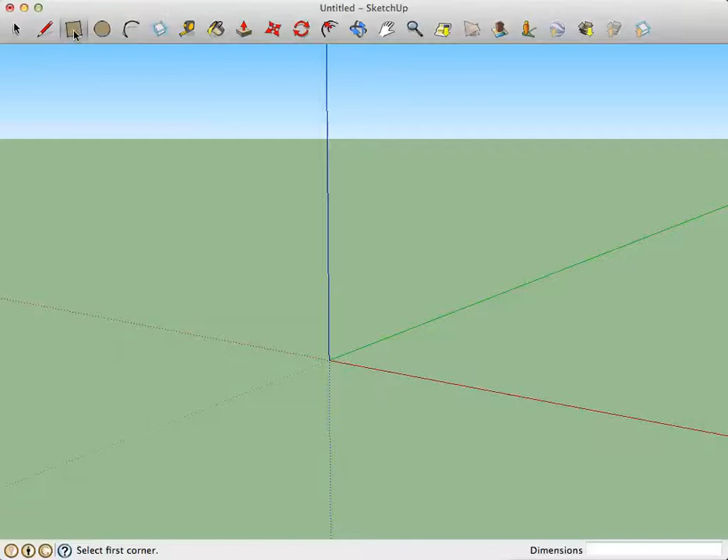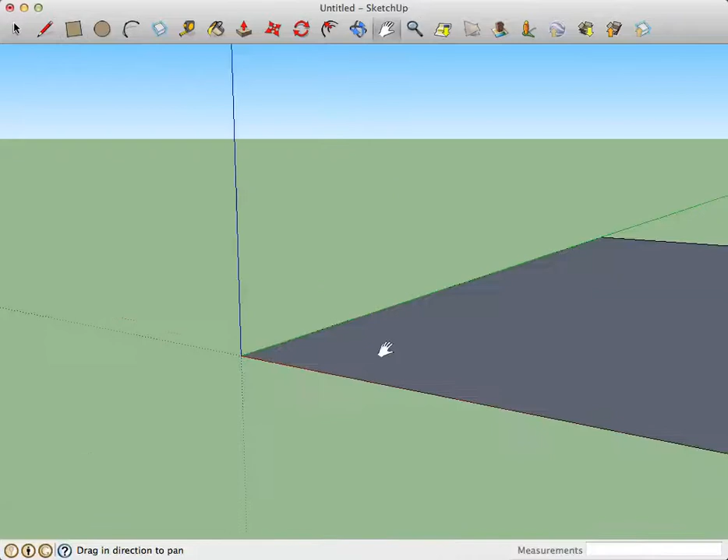I'm going to click on the rectangle tool, start from the vertex, the origin, and then I'm going to click out and drag out. Now, I'm going to change this to 6 inches by 6 inches, and that'll be my base. Hit enter. Okay, and I'm going to just pan this out so you can see. Zoomed in a little too far. Pan that out so you can see how this works.

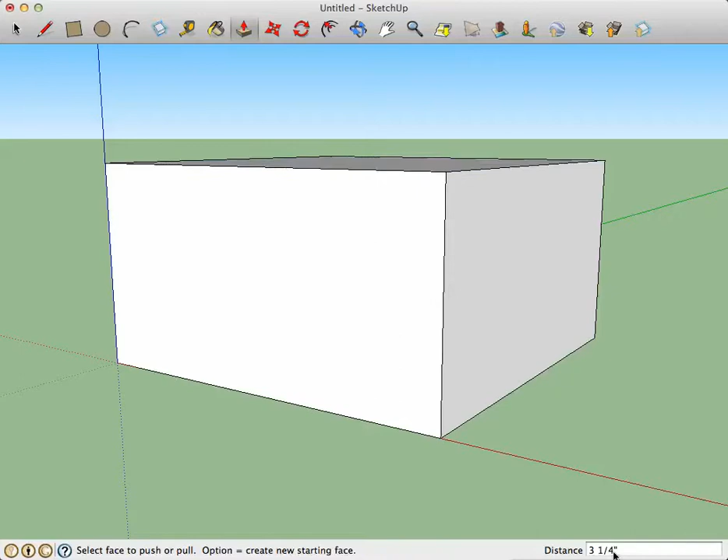Okay, now I'm going to take this push pull tool, and I'm going to click on this rectangle that I built. I'm just going to click and drag it up. Okay, now I can resize this to my perfect size of 6, because I want it 6 inches tall. Okay, there's my cube that I'm going to start out with.

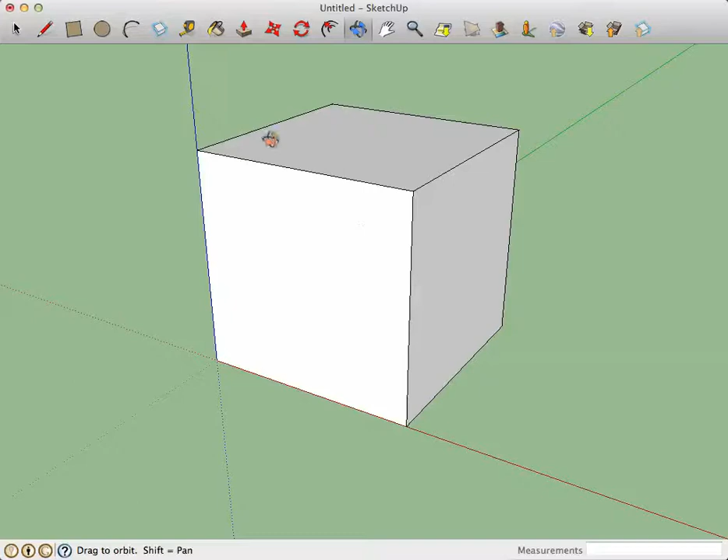Now to build this, basically, we're going to build it by deduction. So we're gonna take pieces out. Okay, so the first thing I need to do, I need to take this front wall and move it back 4 inches. So what I'm going to do is take this push pull tool, and I'm going to move this front wall, I'm sorry, everything except for the 1-inch base.

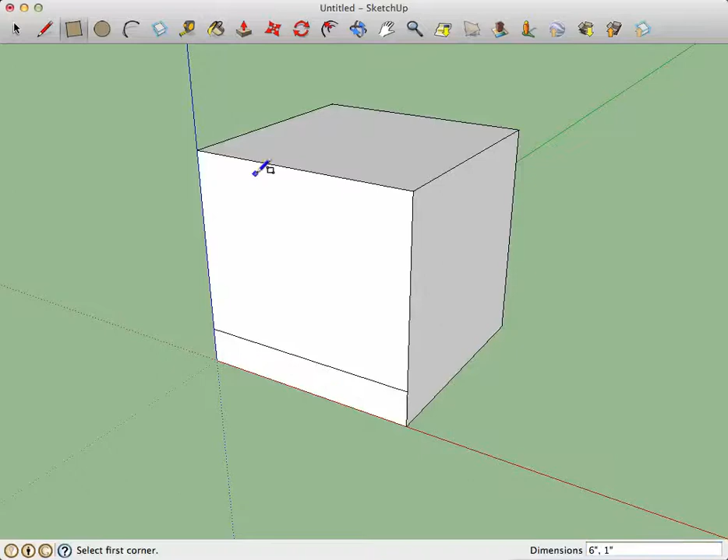So first of all, I got to draw me a rectangle again at the bottom, and I want to make it 6 by 1. Okay. Alright, so now I'm going to take my push pull tool, and I'm going to click and drag it back to 4 inches. So we should be at -4 at the bottom. You can see the distance moving. So I'm here at -4 inches.

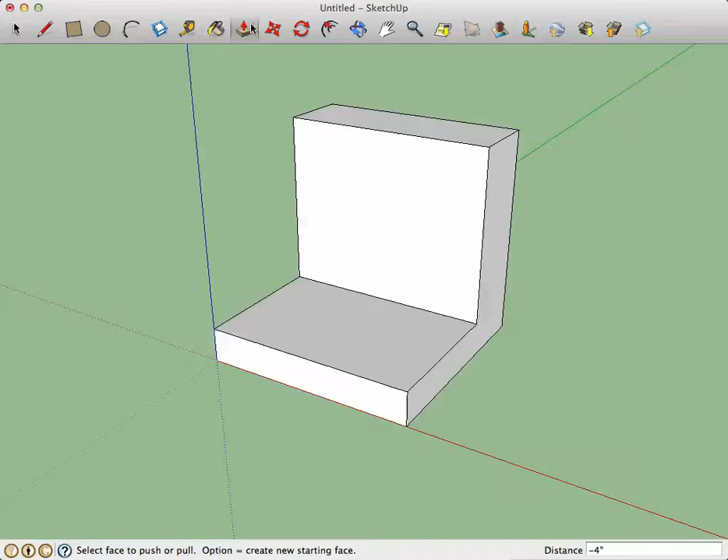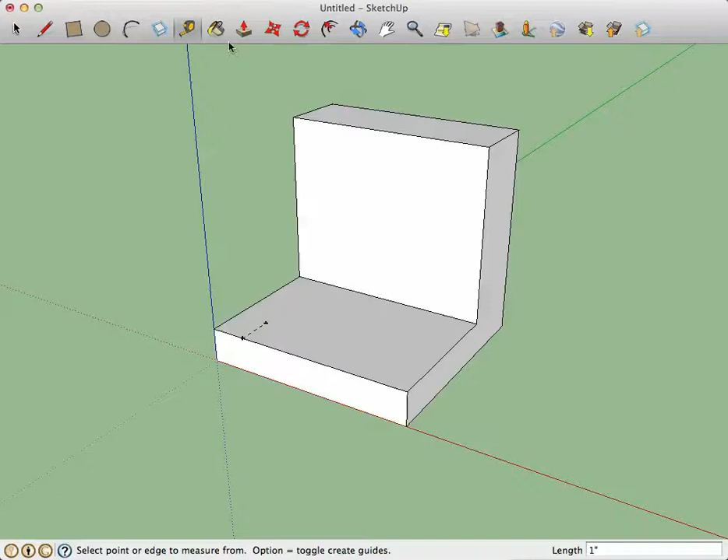Okay, that's my base. Now within that base, there is a square knockout. So we're going to go 1 inch this way, and then we're going to go 1 inch in depth, and there's a hole that is 2 inches by 2 inches square right there. So I'm going to draw me another square right here that is 2 by 2. Okay, hit enter. So there I have my hole.

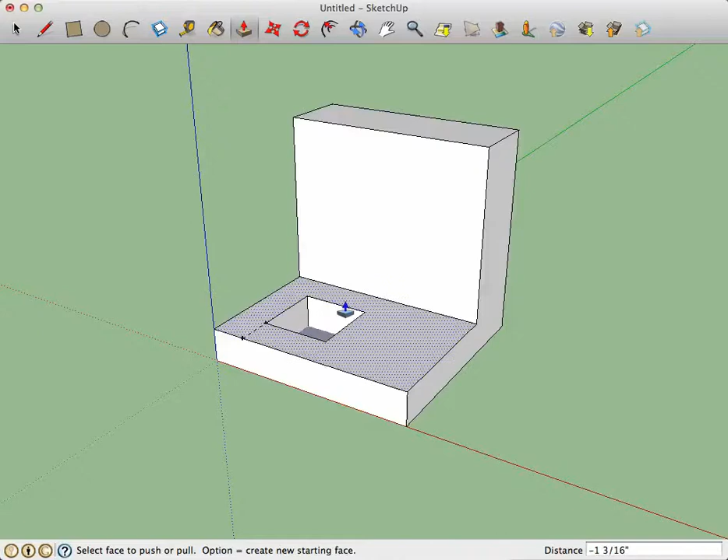Right now it's just a rectangle, but now I'm going to use my push pull tool, and I'm going to get rid of that. Okay, and it'll go all the way down, and you can rotate this thing to see the hole. Now I'm gonna click in that hole and completely delete it, so you should see green underneath. Okay, so just click to delete that.

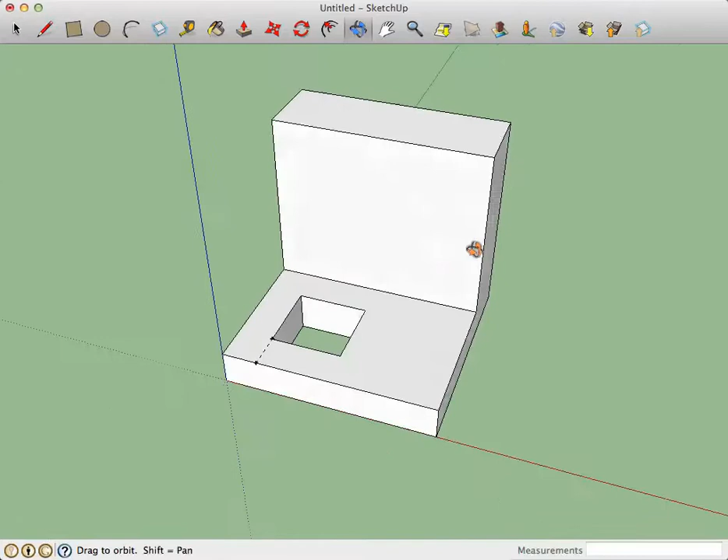Okay, it's completely gone. Now we need to cut off this front edge, and it looks like it starts at 4 inches from here. So I'm going to drag this ruler 4 inches down, and then it also is 4 inches from here, as each little unit is 1 inch by 1 inch.

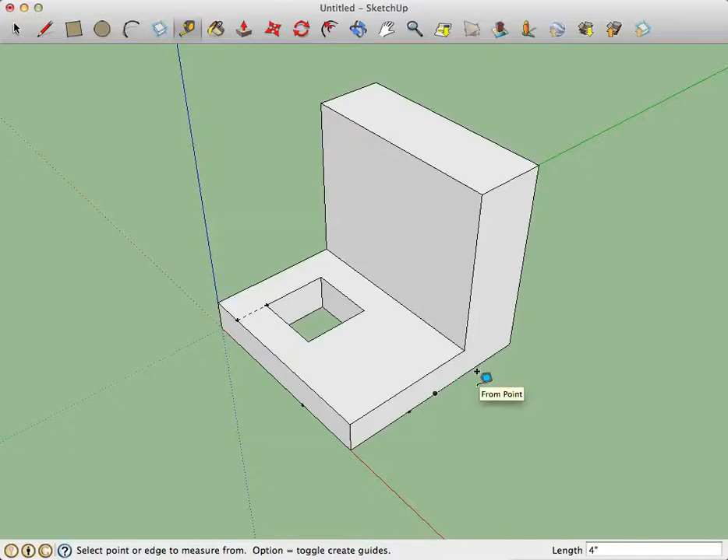And so now I'm going to take this pencil tool, and I'm going to draw a straight line across to there. I need to do the same thing here, and it locks it in place for you, so it's kind of nice. Alright, so now we're going to get rid of that. I'm going to use my push pull. I'm going to push it down, and then I got rid of it. Okay.

Alright, so now all we have left to do for model number 3 is we need to take out what looks like an arc right here. So the arc starts 2 inches off this front edge, 2 inches in. So we're going to move it to 2 inches here. And you could just type that in. And 2 inches from there.

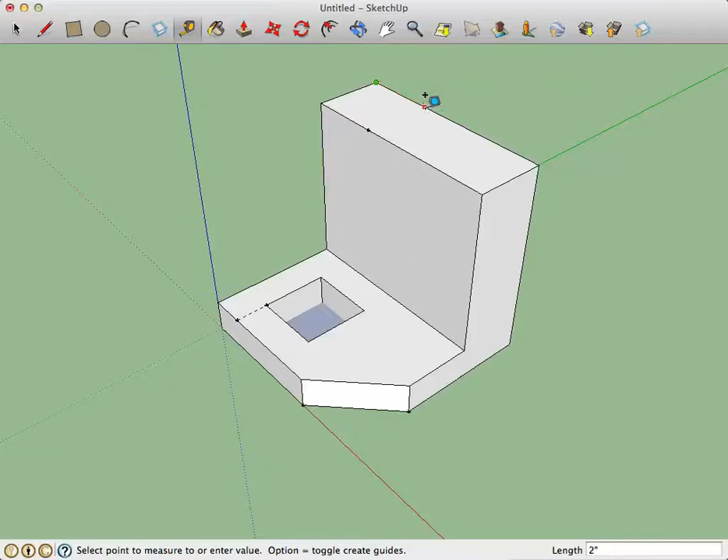Alright, and it's also 2 inches from the bottom. Okay, so let's go 2 inches up. And there we are. Now we're going to also put that line, so that'll tell us where we're going to connect this.

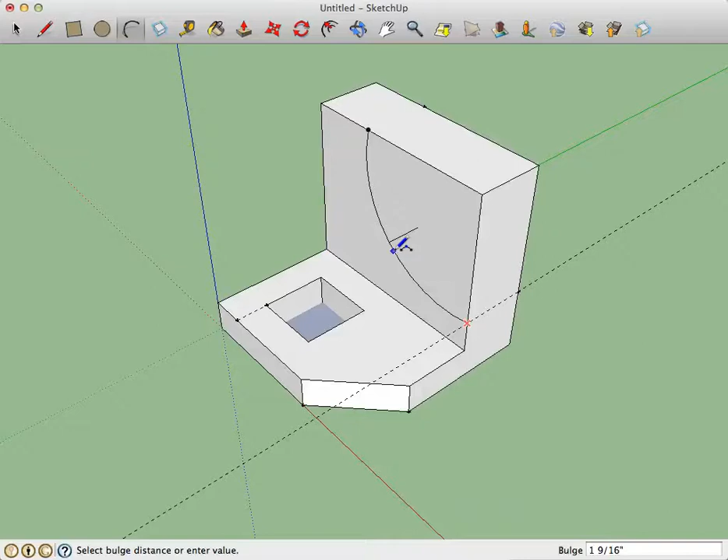We're going to take the arc and we're going to make it go across here, and then let's see, how far down does the arc go? It looks like it's going to go down and be at the 3 inches over. So what I want to do, I'm going to click off this. I'm going to undo that arc because I need to make one more measurement.

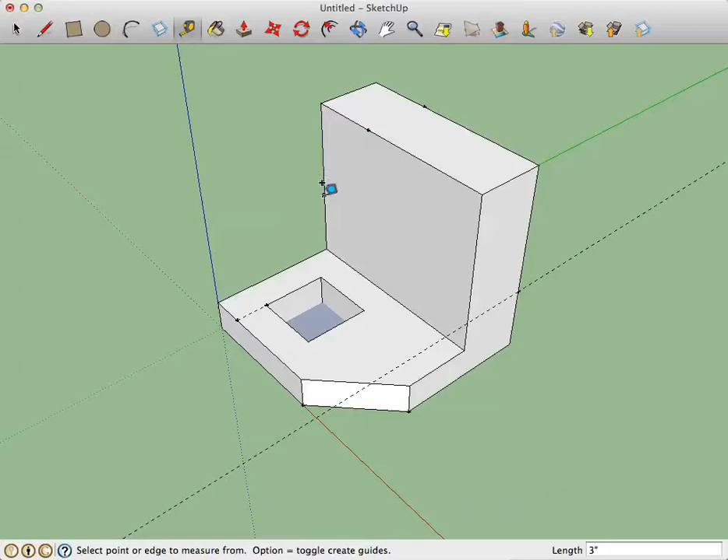So it looks like at the midpoint, which is 3 inches down, so 3 inches down, which will be our midpoint of the entire side. And I'm going to come over 3 inches, so I have a point in which I now know where my arc will touch, and it will touch right there.

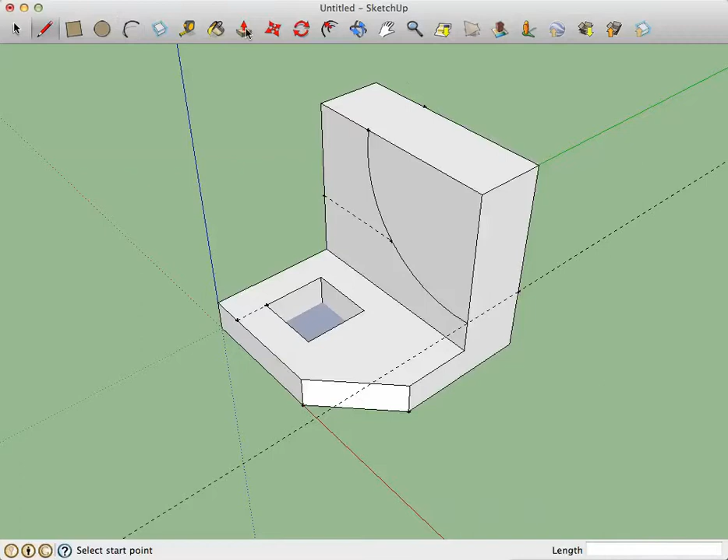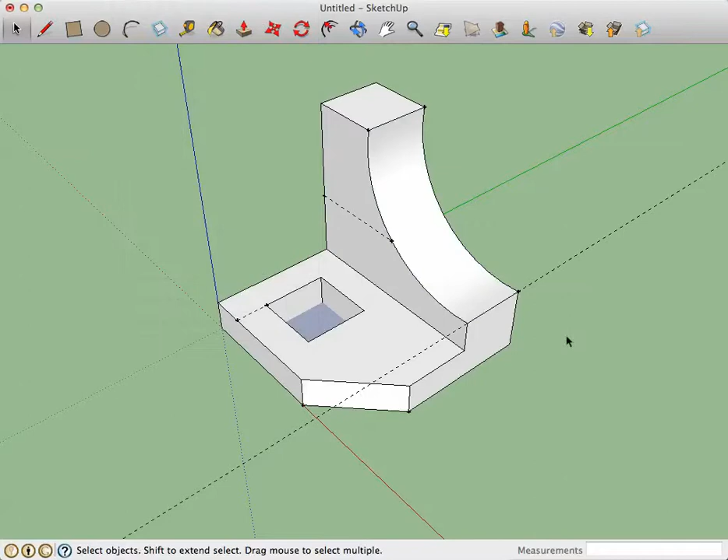Okay, so what I'm going to do, I'm just going to take my push pull tool, and I'm going to drag that back, and it's gone. Notice this is still solid. If I wanted to open it, I could click on it, hit delete, and it'll open the box. But my picture has it solid, so I want to undo that. I do not want to erase that. So there is the model number 3. Okay, it's very easy. And it's supposed to be green there.

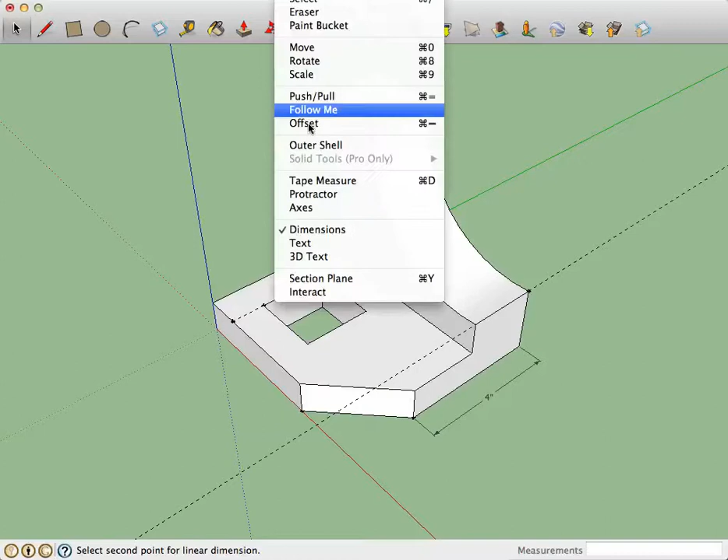Now, to make sure my measurements are accurate and to show the builder, we'll click on dimensions, and if I click on these lines and drag them out, it will tell the builder exactly how long each thing will be. Okay. So I can pull this side out, and okay, we can also pull this out. That's 5 inches from there to there, because that base was 1 inch.

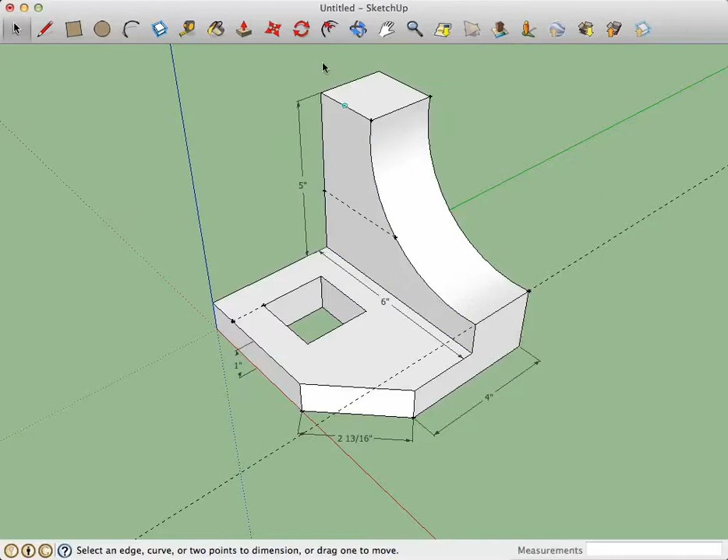Okay. Base was 1 inch. Alright, this should be 4 inches here. Okay. And I could go throughout this whole thing. That should be 6 inches. And you simply just pull and drag it out. Now I can get rid of these guides. If I go up to tools and click on the eraser, I can get rid of these guides. Okay, make it look a little bit nicer.

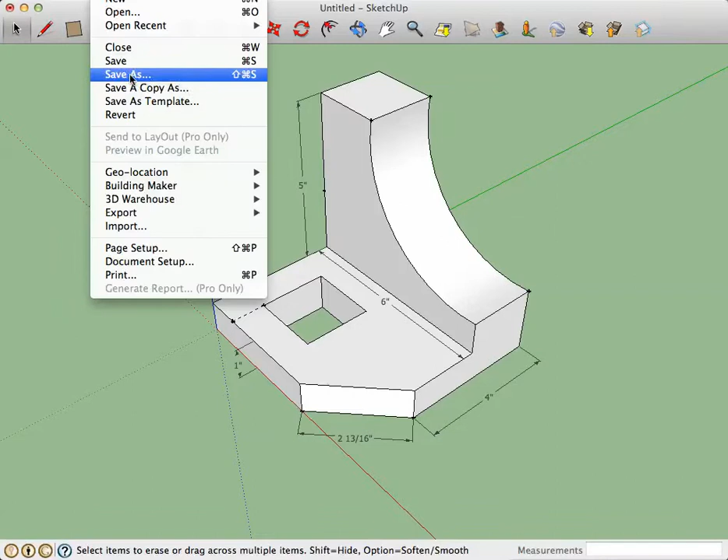So there is my model. Okay, so then I'm going to click File, Save As, and then I'm going to title it Model. That's Model 3, and that's 3A. And I'm going to save it as a SketchUp, okay, in my solid modeling folder.

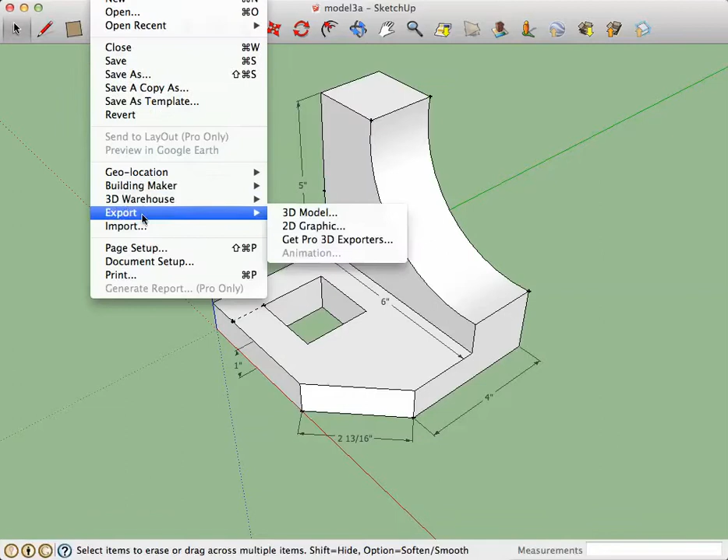Okay, I can also export this thing as a 2D graphic, so just like a picture of it, which I'll do for my PowerPoint. So I'm gonna export it to the same folder as it's just gonna take a picture of this. So that's how you do the solid modeling using Google SketchUp.

I have 12 models there, and all I want you to do is pick 10, and you can put the Google SketchUp files, or you can simply export to a JPEG and send it to me that way. But I do expect these dimensions to be there, just so I can see that you got your dimensions. The dimensions are appropriate.

Okay, and that's that. So I hope you have a fun time with Google SketchUp. I've never really used it before. It took me about 10 minutes to learn how to use it.